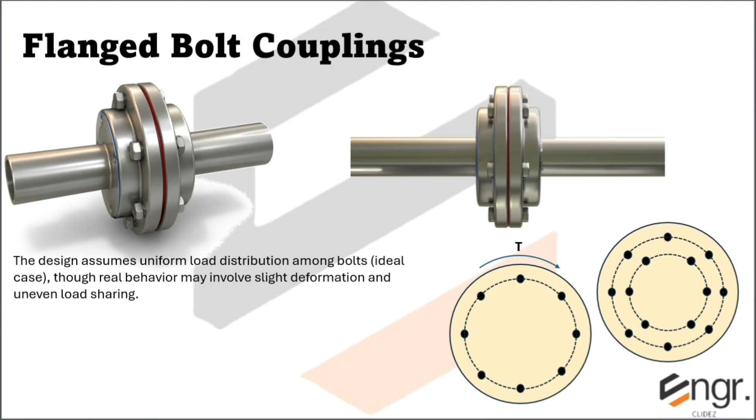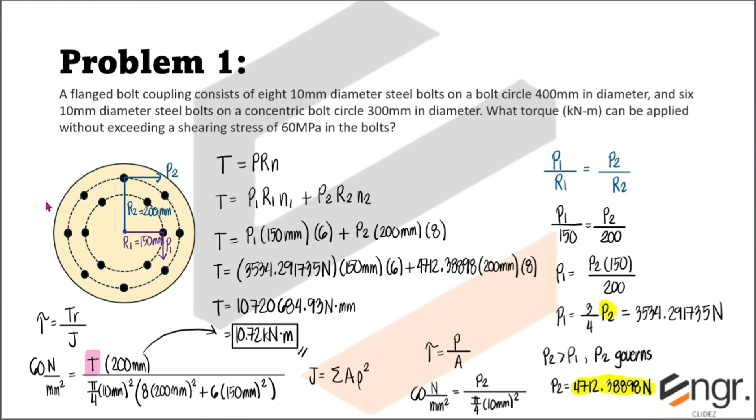Now what we want to compute are the maximum and minimum shearing stresses developed in the rivets. So let's go back sa problem 1. Notice na the larger the radial distance is, mas malaki yung stress na kinikerry niya. Kasi di ba sa problem na to, P2 governed kasi yan yung outer layer. So the outermost bolt group pala would be the most stressed. Basically, the farthest from the center.

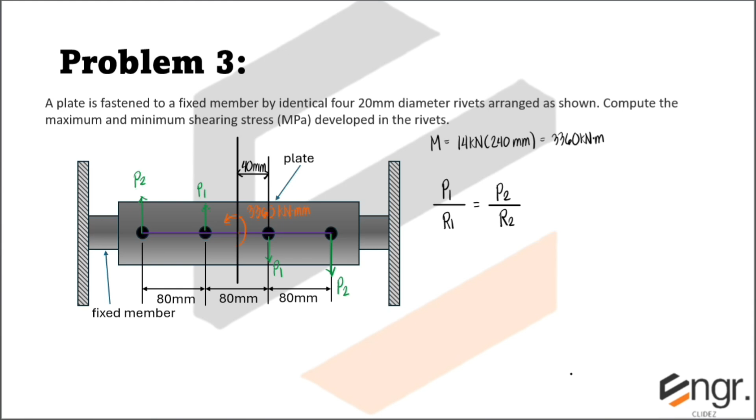And from the center naman, going to P2, extend na lang natin yan. We project a vertical line. This will be 40 plus 80 mm. Ayan, 80 plus 40. So, 120 mm. So, P1 over R1, R1 is 40. This shall be equal to P2 over 120. So, P1 in terms of P2 will be P2 times 40 divided by 120. And we can further simplify. 40 over 120 is equal to 1/3. So, P1 is equal to 1/3 of P2. So, equate natin sa formula ng torque. T is equal to PRN. But we essentially have 2 layers.

The first radial distance is 40, the second naman is 120. So we can denote this as R1, ito naman R2. So we would have T is equal to P1 R1 multiplied by N1 plus P2 R2 multiplied by N2. Ayan. So the torque will be equal to P1. P1 in terms of P2, we would have 1/3 P2. Pinalitan natin yung expression ng P1 in terms of this.

Then R1 is equal to 40. Now N1, number of rivets sa innermost layer, we have 2. Then plus P2 R2. R2 naman is equal to 120. And N2 is also equal to 2, the outermost layer. Dalawang rivets. And yung torque natin is actually this couple moment. So 3360 kilonewton mm. Lahat ng mm magka-cancel sa R1 saka R2. So our resulting unit for the force is in kilonewtons.

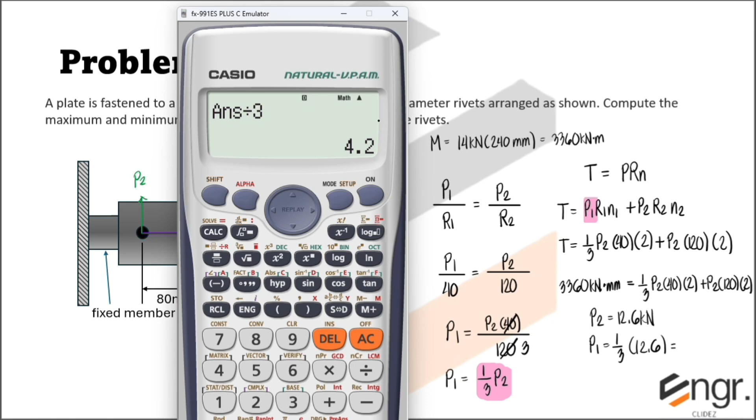We copy this one. So solve natin si P2, we would get 12.6. So P2 equals 12.6 kilonewtons. And solving P1, since P1 is 1/3 of P2, we would have 1/3 multiplied by 12.6, just divide this by 3, we have 4.2 kilonewtons. And so solving the maximum and minimum shearing stresses, the minimum shearing stress would correspond to the smaller force. The smaller force is 4.2.

So 4.2 kilonewtons, convert this into newton para megapascal yung result natin. Times 1000 para maging newton. Area is pi over 4. Diameter of the rivet is 20. So 20 mm squared. This will now be newtons after multiplying by 1000. So our minimum shearing stress would be equal to 4.2 times 1000 over pi over 4, or 0.25 times pi multiplied by 20 squared. So we have 13.369 megapascal.

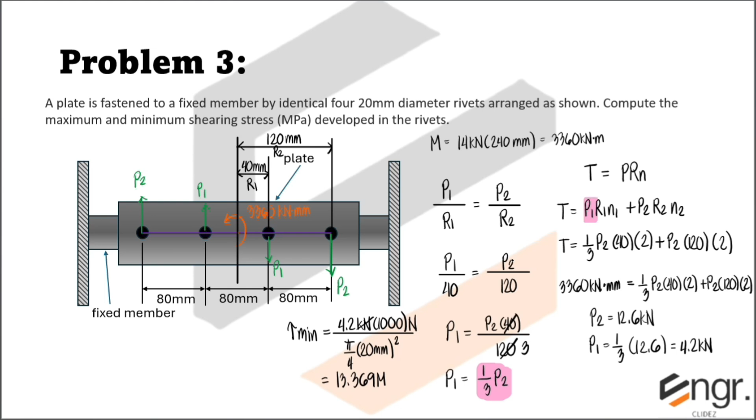Then for the maximum shearing stress naman, we will use the larger force, which is P2. That would be 12.6. So 12.6 multiplied by 1000, then divide natin by the area, pi over 4 multiplied by 20 squared. So this will give us 40.107. Unit is in megapascal.

However, instead of using these formulas, we can also use the alternative one, yung gagamitin natin TR over J for the shearing stress, tau min or tau max. We have the general formula T times radial distance divided by J. But the J we will be using would be the polar moment of inertia of the bolt group. Now, na-solve na natin yan sa previous example and na-check natin na same result lang. The torque is equal to 3360.

The smallest radial distance is equal to R1. So we can denote this as ρ1. And the largest radial distance is equal to 120 mm. So we denote this as ρ2. So for tau minimum, we use ρ1. And for tau maximum, we use the largest radial distance corresponding to ρ2. So, minimum, use 40 mm and lagyan natin ng comma 120 mm for minimum and maximum. Now, we divide this by J.

Yung J naman, again, that would be equal to summation of A multiplied by ρ squared. Now, yung area is common lang. Identical kasi lahat. So, area is pi over 4 multiplied by 20 squared. Now, yung kN dyan, pwede natin gawing newton. So, just multiply everything by 1000. Now, merong dalawang bolts separated by a distance na 120 mm from the center. So, dalawang 120 mm squared natin, rho squared. Then, plus, dalawang bolts din separated by 40 mm from the center. So, times 40 squared.

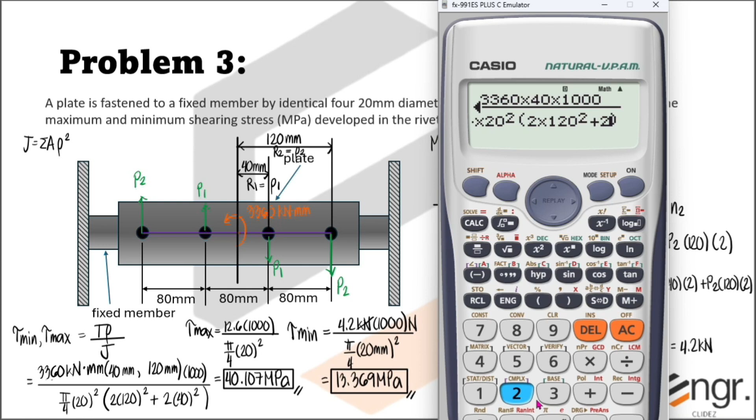Essentially, sinum natin yung x squared plus y squared. Walang y squared since horizontal yung bolt group. So, yung x lang yung sinum natin, 120 saka 40. But, this is still equal to the radial distance since isang line lang. So, we will try to compute 3360. First, we use 40. Then, our conversion factor is 1000. And we have pi over 4 times 20 squared, then multiplied by 2 times 120 squared plus 2 times 40 squared. Therefore, our minimum shear stress would be 13.369. Diba, same lang kanina.

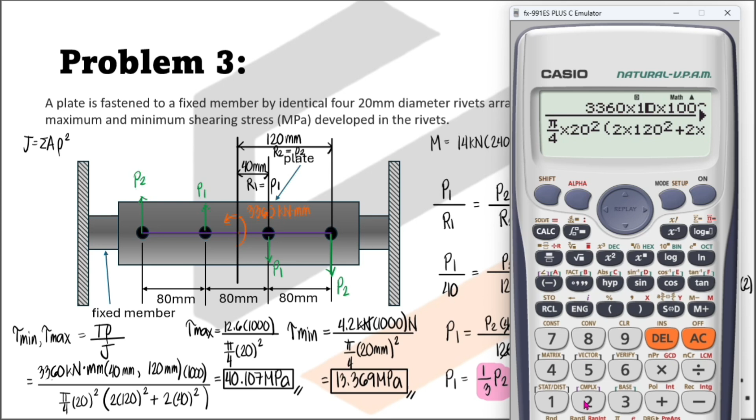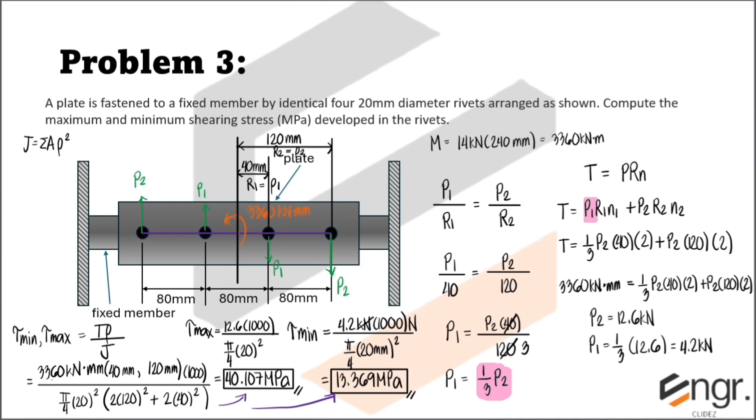And then for the maximum, just change 40 into 120. So we have 40.107 MPa. So same results pa rin. That's why this is a very useful formula if same yung material, same material and same size. So we could still obtain the same values.